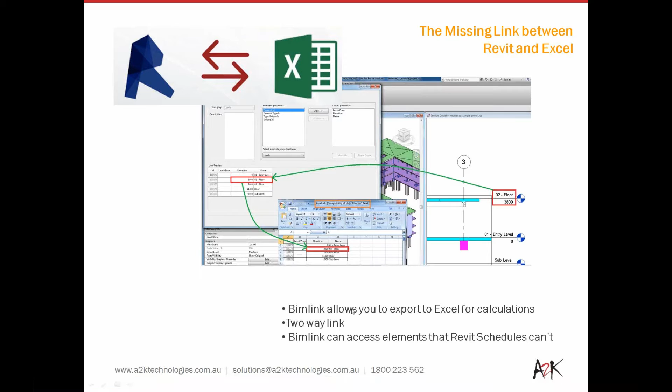We'll go through doing things like renaming views, which will make everyone's life a lot quicker. Also, at the same time, I'll be doing the drawing sheets and adding a prefix, like a different stage or work package as needed at different stages.

In addition to why you need to head towards the BIMLink game, there's been a fair bit of misconception out there that you only need BIMLink when it's a BIM project.

One thing you can really use the BIMLink tools for is reducing the red pen markup, which I'm going to show you. It's just the concept of changing a workflow you've been doing for the last 20 years. Just taking a step back and swapping a few things around, you can save quite a considerable amount of time.

In addition to that, we can also learn how to drive actual modelling elements from an Excel spreadsheet. This goes hand in hand with the red pen markup - you can fill out data and elements will actually change at the same time.

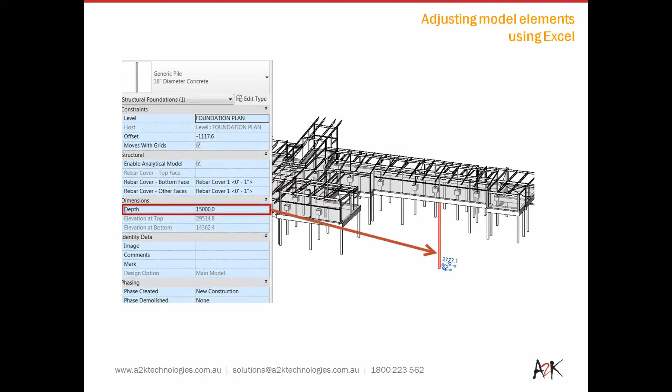One of the most powerful items within BIMLink is accessing the hidden data. Natively inside a Revit schedule, you only have a certain amount of fields or parameters that you can access for each object. BIMLink basically goes down to a new level, allowing you to access these levels and do something with it.

As you can see on the screen, which I'll show in the demonstration, is your coordinates. So if you're having to do a coordinate schedule for all your piles, you have the ability to essentially set up your X and Y coordinates.

At this point I'll quickly jump back into Revit now and go through some of the demos. So our first one - can everyone see my screen? Sean, got my screen up? Yep, perfect.

On the right-hand side you can see the browser setup. Predominantly in a lot of companies' standards, often it's capitals as a start point, especially if you're in a structural sense and copy monitoring levels and grids across - you're often just receiving what has already been set up. So what BIMLink allows you to do is rename some of these to be capitals.

First of all, we'll go and access the BIMLink tool and create a new link. This basically lists anything that's in the project at the time. We'll quickly jump down, looking at views - this is our view names we're looking for at the moment.

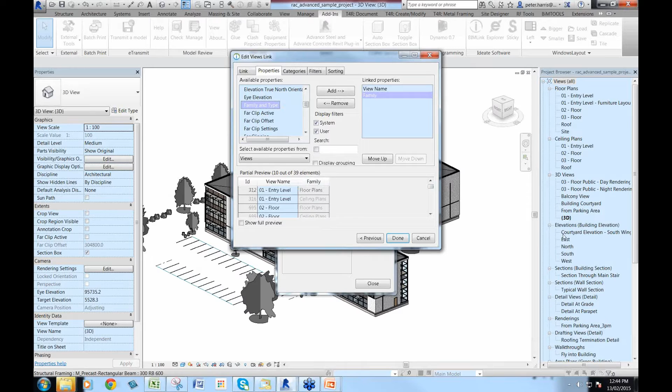So at this point here, I'm just now going to go to Done and export this out. And I'll be just basically placing at this point here and opening this in Excel.

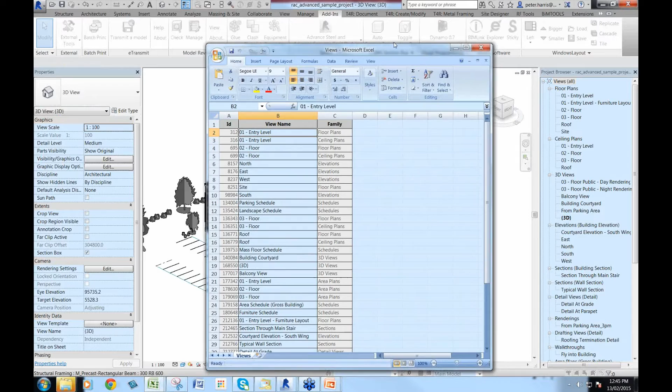So at this point here, it'll just allow me to very quickly start looking at, say, floor plans. So this way I can have a look at floor plans, and I'm only seeing what floor plans are there at the moment. There are many other sorting options under the data with sorting that you can do, but this sort of is just a quicker way for filtering things out.

So in this case here, I'll just go select all. Now what I want to do is make these all capitals. So again, Excel has a pretty powerful tool. So using a function, it's called equal upper, to convert the string to uppercase, starting the function, and you can sort of see how it is.

And as we know from an Excel point of view, very easy to sort of flood all your views. Now at the moment, I haven't worried about if they're all mix and match because it's looking for an ID. So everything within a Revit space has a unique ID. So O1 entry level has a unique ID 312. So in this case here, it's just based in order of ID numbers.

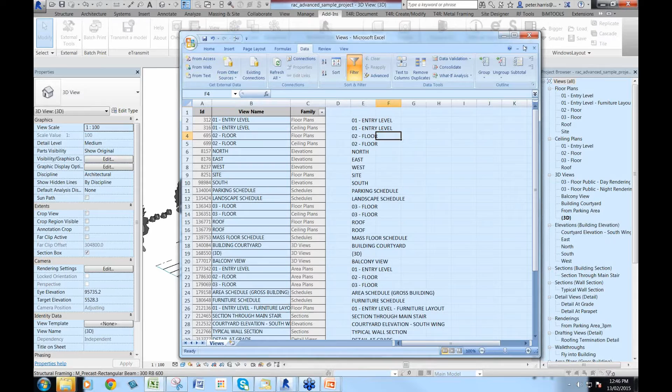So now once I've sort of completed my initial task, I can then copy all the results and paste special and get all the values across. So at this point here, I can leave this here. I don't need to delete any items. I can now save my Excel, close.

I can now, once I've completed that, import, selecting my views, which is the one I've just created. When you are looking at renaming views, it's highly recommended that you do not press yes. This will rename all the corresponding views.

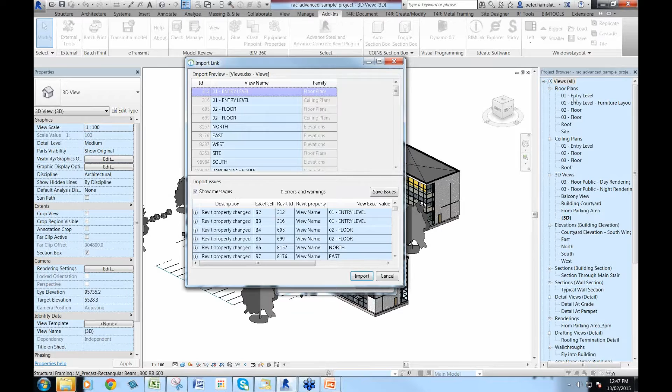So this will now essentially go through. It's just telling us what it's about to do. So what we're looking for is 0 errors and warnings. So that means as soon as I go import, if you're looking on the right-hand side, you should see this update automatically.

And as you can see, a very, very quick method to be able to essentially do uppercase. At the same time, because it's in Excel, you can do spell checks and whatever you need to do.

Now, if I now need to sort of, I'm going to go back and add, just to bring you back into Excel, I'm going to sort of add that this is stage 1 for these floor plans. So I'll just quickly open views. So here they are here. So we can sort of see at the moment what it is.

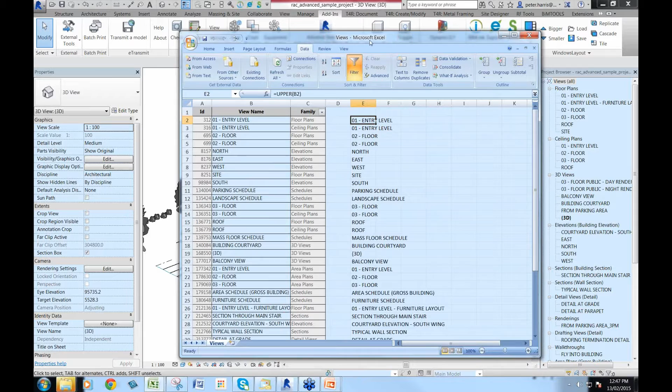Now, if I use a different command, so if I start filling out a new set of text called stage 1 as an example, now what I want to do is, because I only want to work on floor plans, so I'm just going to go back to the floor plans just to filter my list.

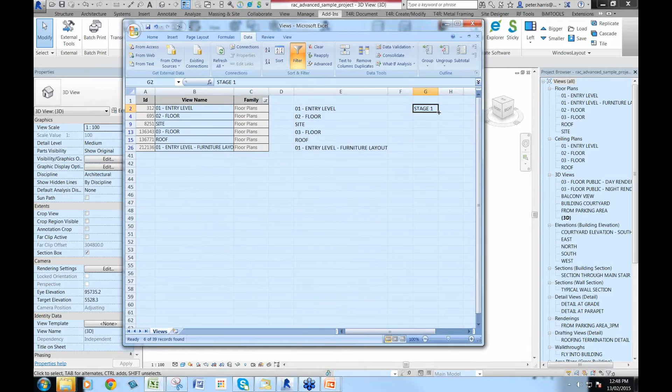So at this point here, now Excel has another command called concatenate. So it joins a series of strings. So if I select that, I want this to be stage 1, comma, inverted commas, dash. So that basically allows me like a typing text. And then selecting then the current text, and you'll sort of see what's done.

So it's stage 1, 01 entry level. So if I now essentially select flood my drawing, and then essentially flood this, you can sort of see how each of these cells are being grabbed as it is. So again, using different commands inside Excel can very quickly help you set things up.

So I'll just paste special, values only again, and okay. Oops, try again. Not quite sure what it's doing. Sorry. Just bear with me.

Activating BIMLink, importing this, and again it's going to tell me at the moment there's probably something that's not quite correct. That's okay, I'm just going to go import and close, and hopefully the answer will be cancel.

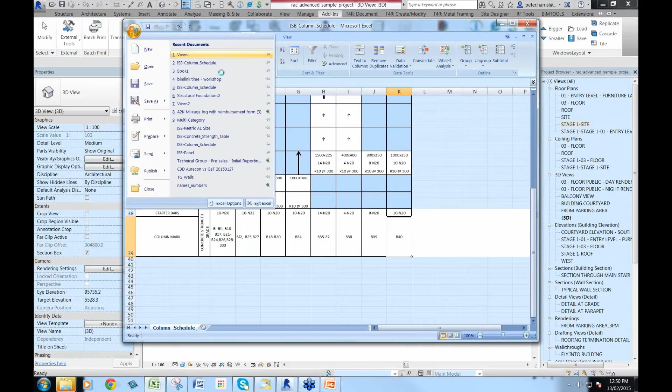You can see how some of these have jumped through very quickly. I'm pretty sure what it had to do with, one of the main reasons I was having the issue is I'd probably have to come back and select all and get all these going through at the same time. Excel gets a little upset with cut and pasting when you have a reduced list at the time.

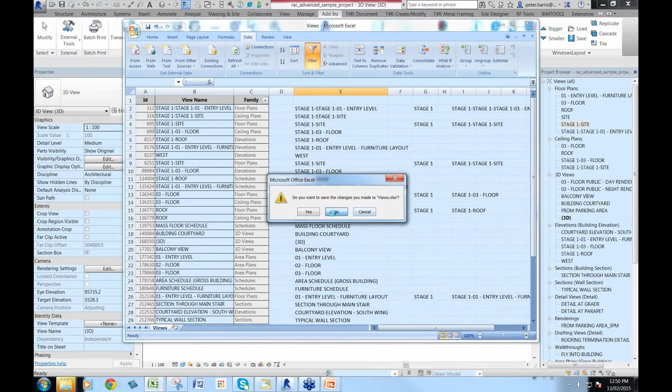As you can see, very quickly, it's a quick tool to help rename things, especially if you have particular BIM contracts and have to rename views according to different contract requirements. In addition to views, you can also do sheets. Setting up drawing sheets can be quite time-consuming.

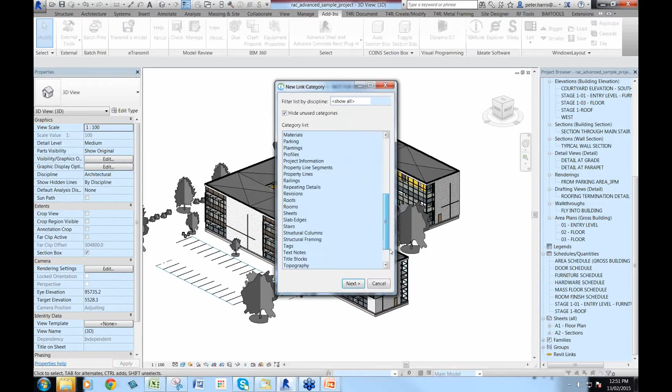Activating BIMLink, in this case I'm going to create a new link, and this one will be drawing sheets. So I'm coming down, looking for sheets, and again I've got all different cells. I'm going to come down and look for sheet number, name, number. I'll just quickly move that one up, so it's at that point there.

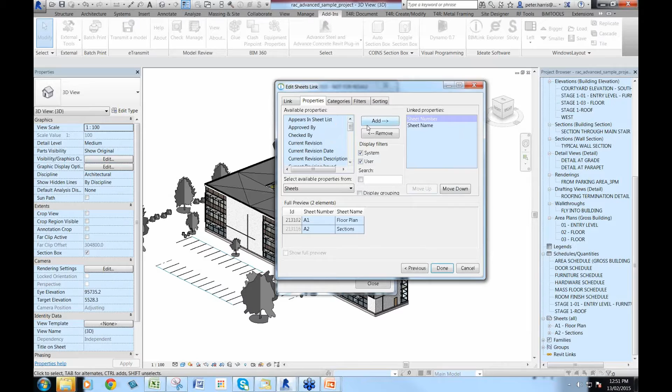I can put any of these other parameters in here, and as part of the training that Sean will talk about at the end, we'll teach you how you can use this to fill out all your revisions. That's done, and I'll export this back out, and I'll call this one Sheets.

Open File. As you can see, this might be called Set Out Plan. So you can have these linking from Excel to Revit. In addition to that, you also have the ability to create your own drawing sheets.

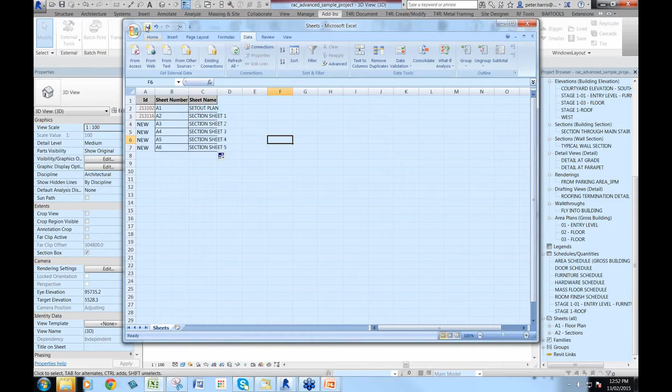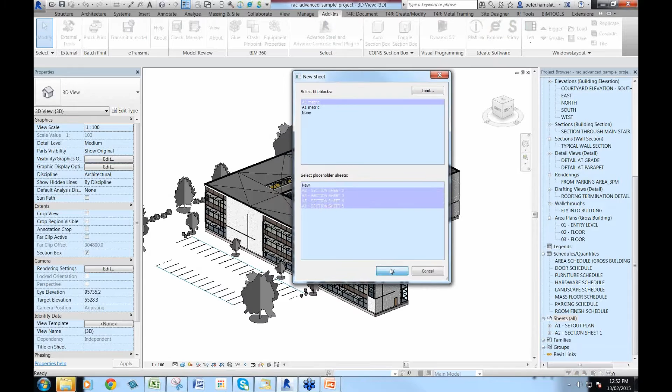Closing this, back into Revit, re-importing, selecting the sheets, import, close. At the moment there's only 2 drawing sheets. Right-click, New Sheet, in the placeholders, My New Sheets. It's a very quick method to fill out your drawings.

In addition to that, there's other add-ins. At some stage we'll be doing webinars through the Tools4Revit, which will allow you to also go through and place views within a drawing sheet. So that's the first part of it, which is the renaming, the admin task.

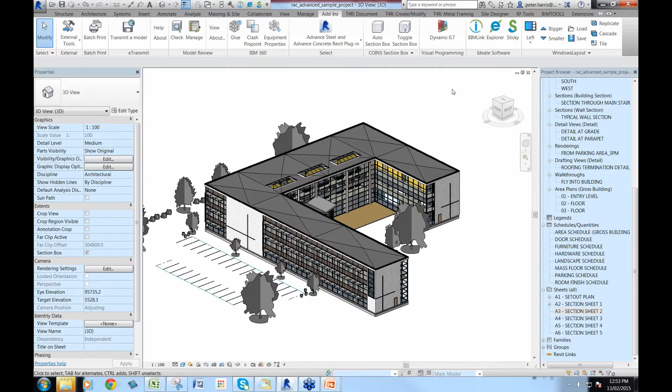The red pen component comes into play for basically anything you need to edit. So what I'm going to do is close out of this and jump into a structural model. I'll just minimize this.

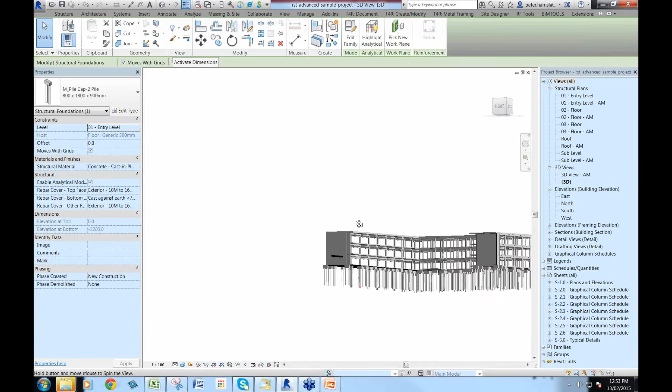Okay, so these are just the Autodesk sample files. Nothing special, but what I want to be able to do first is red pen markup. This can go for any discipline, but structural is a simpler method to show. As an example, each of these piles may need unique elements, which is different loadings, ultimate load, working load.

Very quickly, just to set this all up, I can go to a new project parameter. I'm just going to add a new one, and this will be called footing working load. If you want a combination of text and numbers, you can use text as a type, or numbers or lengths. I'll be using text, and I'll just quickly throw in a text group instance for a quick method.

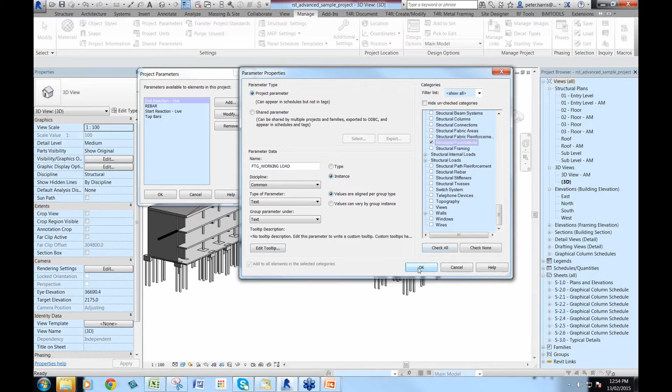Normally I will go through and do structural foundations, which is the one I need. And OK, now if this is a structural foundation, and I know that by hovering or looking to the bottom left, so when I select one of these piles, I've now got my new parameter there.

Now from a red pen markup point of view, your engineer is either going to have to spend a lot of time marking up a red pen on the drawing and give it to the drafter, and they're going to have to do it, or you bring BIMLink into play. That will allow you to essentially export all these piles.

So I'll be going to a new link, and I'll be looking for structural foundation, and it's correct.

What I'm looking for is my new footing working load parameter on the left-hand side. On a normal project, in training we'll go through the process of how you can number your elements. You may also have individual marks, so I might move that up to P1, P2, P3, etc. You can fill this up as much as you need to.

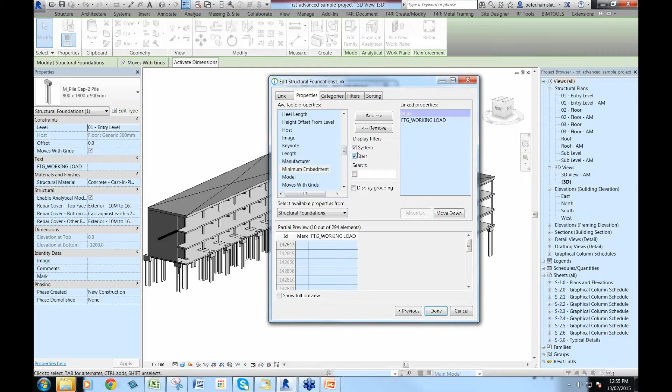Once I'm completed, I export this out and open the file. As you can see, even if these are all say P1 types, this will give you the very quick ability to flood your drawing.

So I've got all my piles, and now the engineer can go and fill out all different data. I'll just sort of do some different information - this is the red pen markup that the engineer can essentially fill out a spreadsheet with. Make this quick.

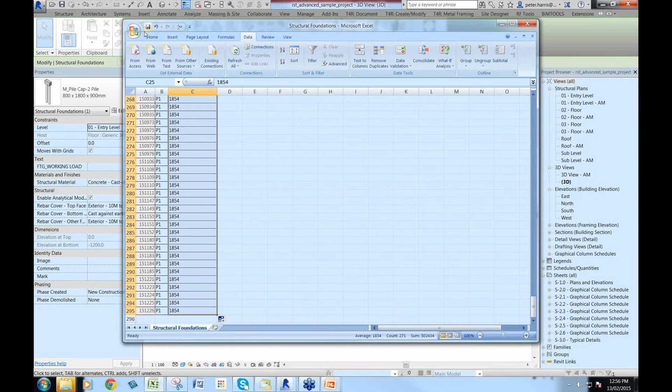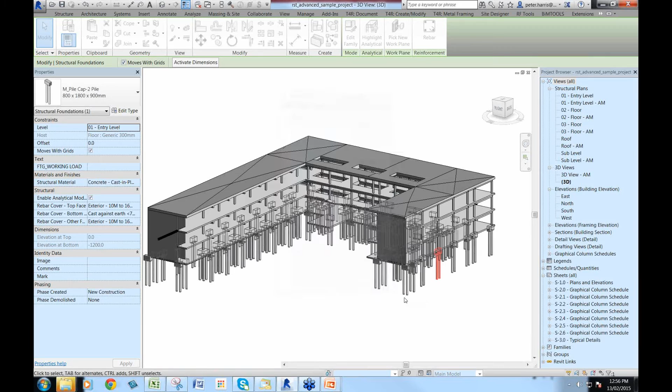Saving the spreadsheet, re-importing, structural foundations. As you can see, it's going to import and fill out some data. Obviously when duplicate marks occur, which is correct in that case, you can see the data filled out.

If I now quickly jump over and create a new foundation schedule, which is the final output of what you need on your project, obviously now with our new information it's got a mark, and I can add comments, can add whatever I wish.

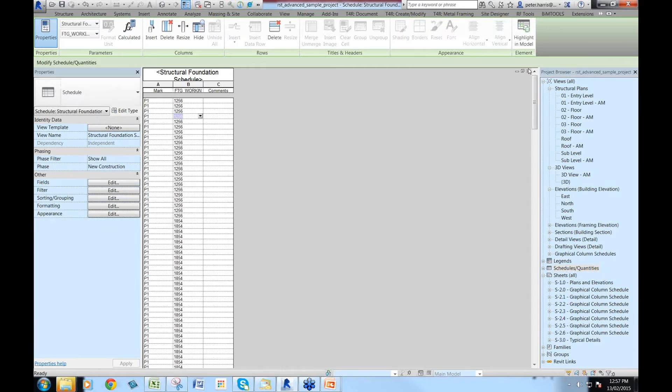So very quickly you're getting all the data. Rather than the individual person filling out information, as you can see, we use Excel as a power tool. Now in addition to this, what we can do is actually start driving the model.

So what we're going to try and do, and the reason I'm going to do it in this step, is because a lot of people miss the step that it has to be an instance-based parameter. This is out of the box families, a standard Autodesk project.

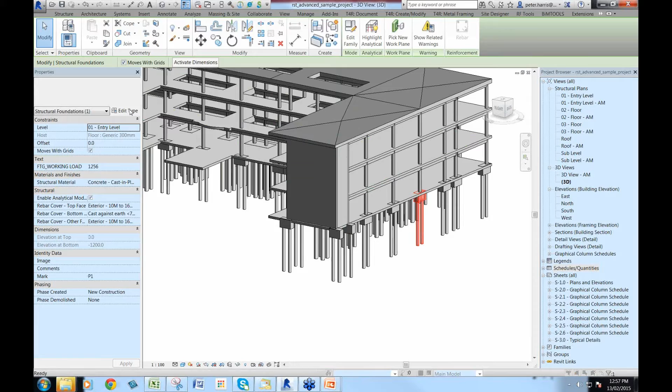As you can see, if I go now to edit type, you can see how basically it's got a length. What I'm looking for essentially is the pile depth - anything that's going to drive the pile.

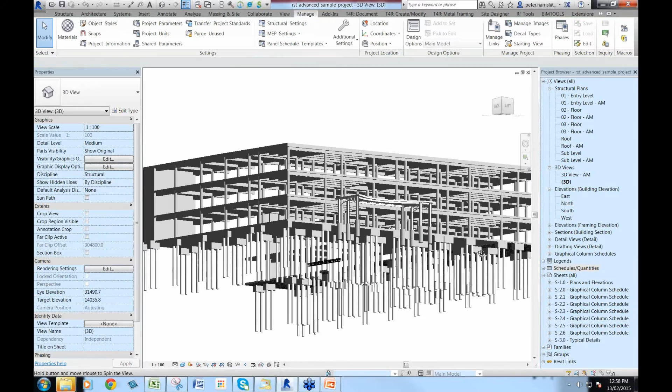So what I might do is try and edit some of these. There might be some individual piles, so bear with me for a tick. What I'm looking for is where does it actually drive the pile now, which it doesn't. So jumping through to edit family mode.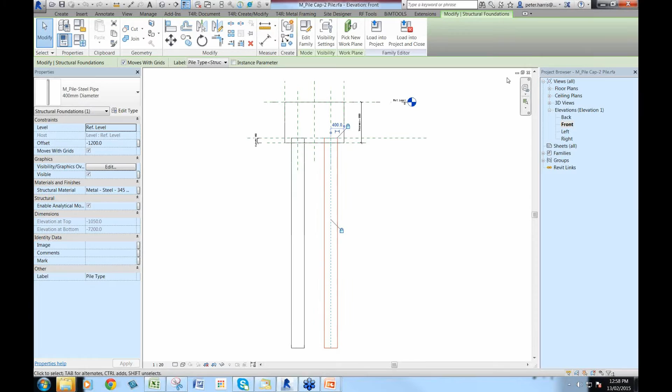Okay, hopefully we don't have any data coming through at the moment. At this point here, we'd have to switch some of these to instance. Just for the ease of the training, what I'm going to do is drop in a single pile, and this will very quickly give you access.

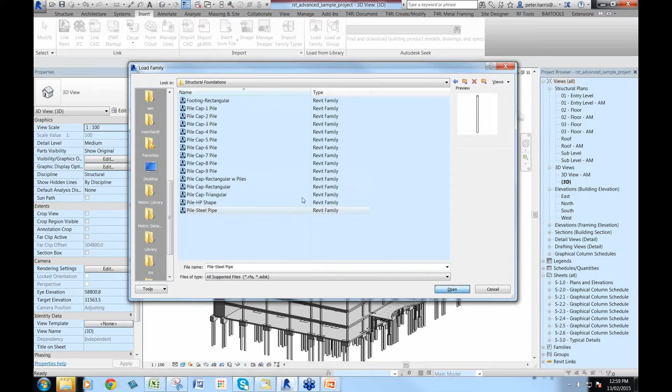Now I've deliberately done this because if it all works perfect in a demo, you guys are going to technically have a go and then realise half the information won't work. So I'm just going to drop in a couple of piles - I hope we've got our single pile in here, which we do.

Again, these are all out-of-the-box families. Hopefully I can sort of see there's the depth where I need that to be instance-based, so I'll just quickly switch him back across to be instance-based.

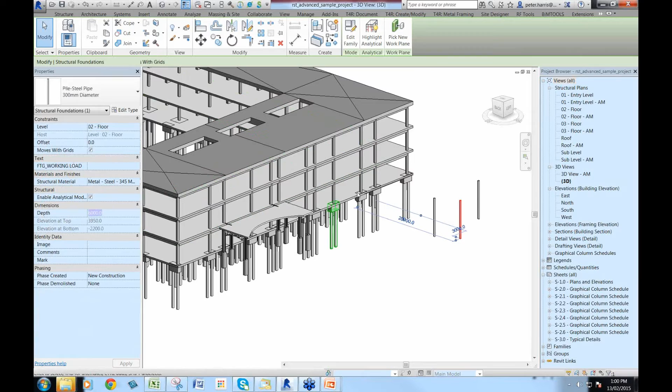Okay, so we should now have individual control which you want. If you can imagine you've got hundreds of these piles coming across, as you can sort of see I've got 12 metres, that should now drive length.

Now, being instance-based, obviously if I now go back to structure foundation, I could go and create a new one, but it would make sense that you basically continually layer up your existing link and add existing data. So I'm now looking for depth.

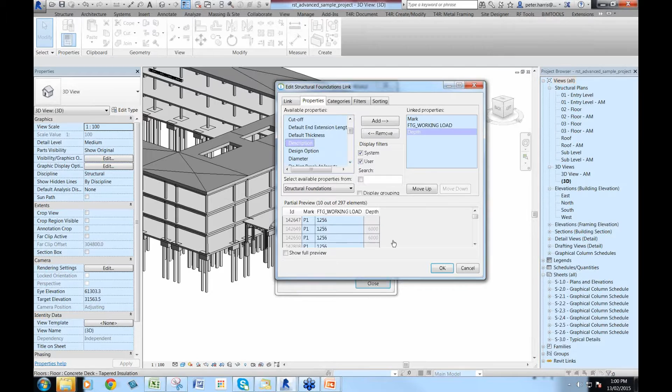And I can sort of see where some of these 6,000 ones are coming through. So what I also might put in here is family and type, and this is going to help me sort of from a filtering point of view.

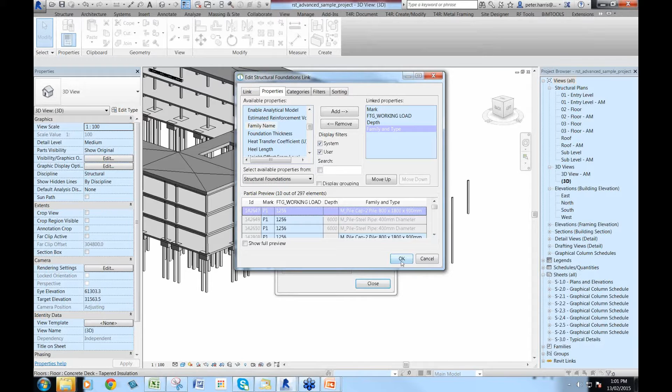I'll just go through that before I export, just double check it. I'm looking for its pile steel, I'm looking for depth as the 6000. So if I now go back to this point here, I'll export this back out, and it's overwrite in this case.

Okay, so you can sort of see the greyed out ones versus the full colour, the light blue. Obviously these are the ones that I can actually edit the information for.

Okay, scrolling down, here's some values here too. So if I now just very quickly change these to 15,000, this will hopefully give you the idea. If you have this pre-set up, and we'll show you in the training, you can have all your pile depths, control all your loadings, so you get one spreadsheet with all the information filled out in one go. Okay, so I'll just make that 10,000. So we should have 3 different piles, saving, closing, import.

Okay, so it's 3 elements that have changed, which is correct. Import, close, and hopefully you just saw now those elements have changed. So that gives you greater flexibility. And to make this work, it's just changing some of your habits that you've been doing for a while, and just sort of taking a step back and working out a best workflow.

So that's the sort of red pen and adjusting the model. Now, where you can sort of get hidden data is, as an example, on any of these foundations, there would be a coordinates. After I've acquired coordinates and got all my data set up natively inside schedules, which I'll show you, if I go to a structural foundation schedule, and it's the same with any elements in any of the packages, I can't see the coordinates. There's no fields available.

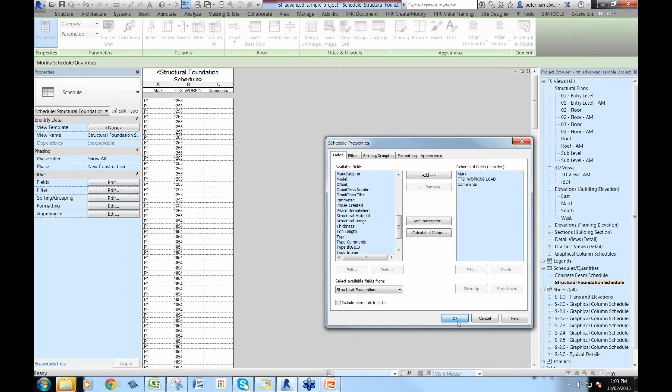So what I'm going to do is use the comments on these, just for this example. I'm going to fill that out with the coordinates. So again, with the BIMLink, accessing that, and double clicking to access more. So again, what I'm doing is layering it up slowly but surely. So at this point here, I can now go down to coordinates, selecting my X and Y's, exporting these out.

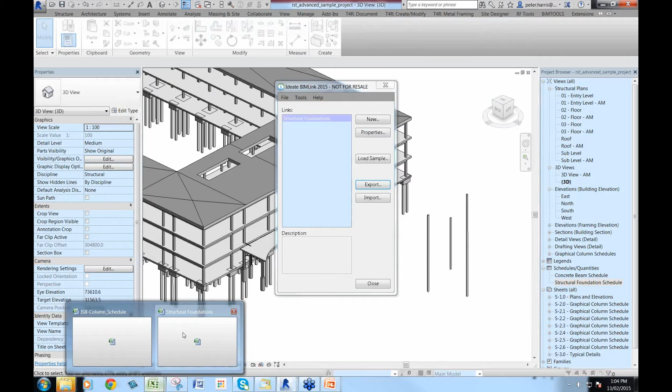Opening the file, and you should be able to see all the coordinates of all the piles. So what I'm going to do now, at this point here, you can sort of see very quickly I forgot to add the comments, so that's fine. Yeah, all you're going to have to do is just go back into BIMLink, so we'll just close that out again.

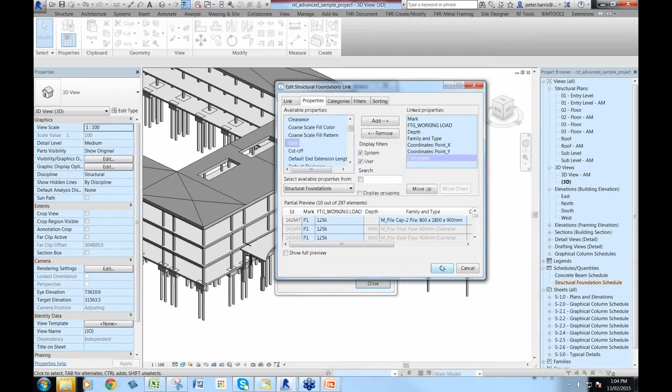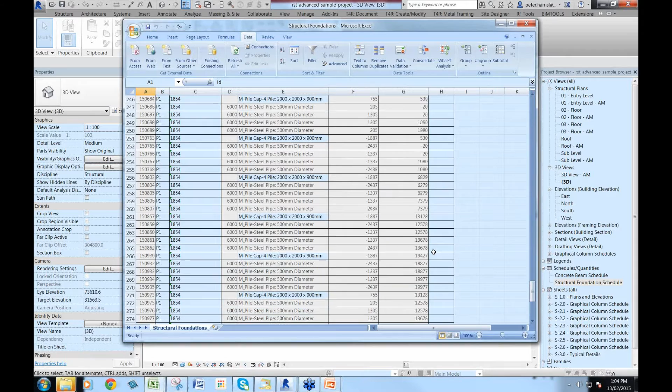Selecting this, exporting that back out, opening my Excel. Okay, so here's my comments, I'm just using that data. Okay, so what I want to do at this point here is sort of grab the X and the Y with a comma between and have it as basically a data set out point.

Okay, so using the function concatenate, I want to essentially have it say P1, comma, inverted commas, start brackets, inverted commas, comma, and then comma, inverted commas. And we teach you all this inside the training.

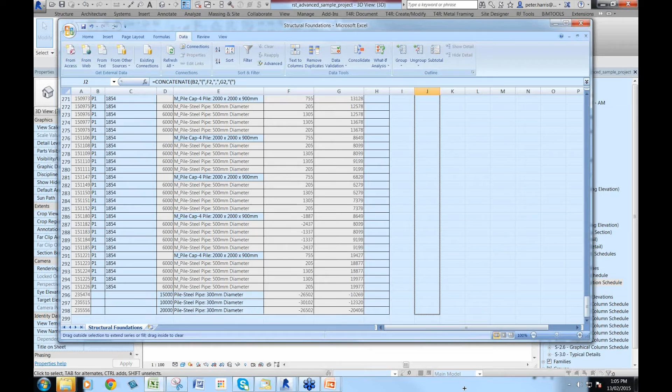As you can see now, that should very quickly... basically what I'm going to do is fill this out. So it's P1, it's reading all the data. Now that's just units, this is just an example here, I just won't worry at the moment. So I'll just quickly flood my model. Okay, as you can see at the moment there's no parameters sitting over here, so I just might quickly make these P2.

So that's all come through, which is good. Grabbing all my information, copy, paste the values, saving this, re-importing back through. As you can see, it's 297 elements it's found, so there should be 297 foundation elements. Import and close, duplicate marks, which was correct prior.

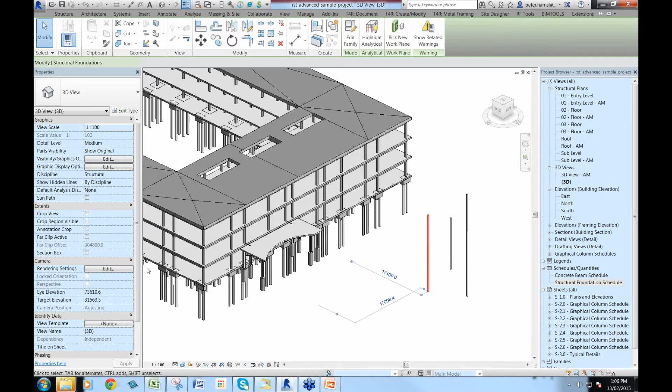As you see now, I've now got my comments, which is at P2, and it's got a coordinate set up. So that should sort of give you a bit of a taste of all the hidden data, and there are many, many more things that you can access that you can't natively see from a Revit point of view.

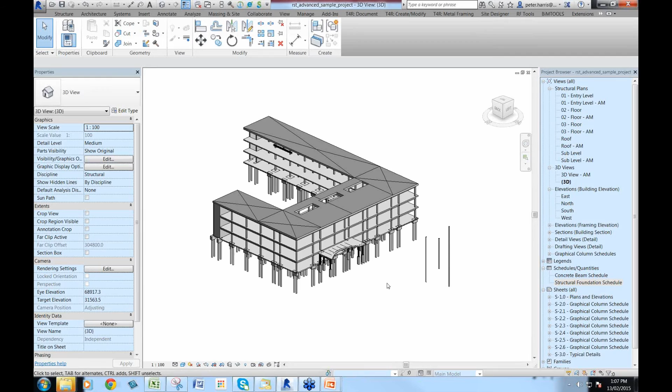Okay, so that's the sort of hidden data information and the red pen markup and the views. Now, as I've just said, there's many other things you can try and do with this. It's essentially, from a BIMLink point of view, it's anything that is repetition. So if there's a repetitive task in your office, you've got to try and find a way through it, and at least BIMLink will give you the option.

Now, that's the sort of first few things I want to show in the BIMLink. Sean, would you like me to now jump through and just show them a bit of the Sticky and the Explorer? There are other products that Ideate make.

Yeah, there's just one quick question here from Christian, which was to change the sizes, does that size have to exist in your project already?

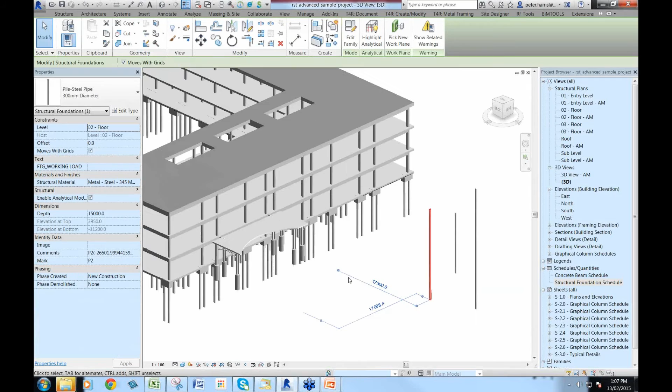To change the size of this pile, yes it does, because BIMLink is looking for anything within the project and the project's database. So if you don't have that type or size within your project, you can't extract it from a secondary database.

There are quite a few questions about Excel skills, but as mentioned, that will be covered in training courses. Part of the BIMLink training we're setting up includes a handout cheat sheet. You can't become a guru in Excel, but we can give you the top 6 to 10 tips of what you need to do inside it.

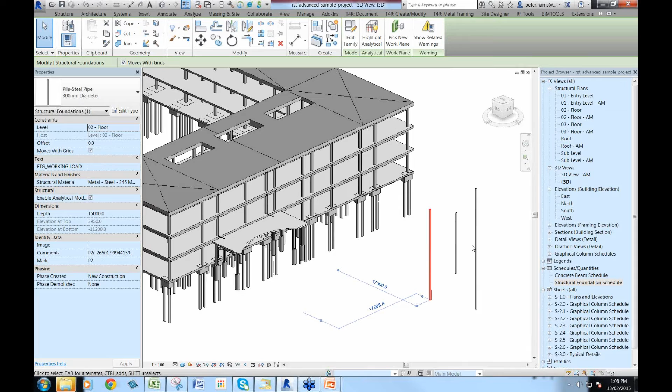The other questions were really about the applications of this. Obviously you've got the experience to know you can use it for these piles. A question just came in asking what the applications are for estimating.

Yes, correct. Any element that you model, if it has a volume or an area - let's pick this one here, the roof, what have we got? We've got a volume and an area. If we've got that information, in addition to other parameters for estimating, these are all inbuilt, which is cost. But that's not stopping you as a business from having your own inbuilt information to apply rates or whatever you need, and you can export everything out from a costing point of view.

However, it is as accurate as you are modeling, because it is real live data.

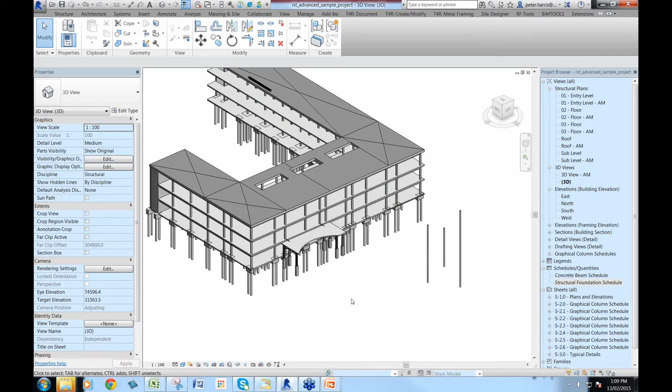There's plenty of questions around that, so I'll pick the common themes. Coming back to where to apply this, part of what I do is also get to sites to help people understand their current workflows and where they can use this - almost trying to enlighten them that if you change some of your workflows, you can save a lot of time and hence a lot of money in the business.

Could we jump onto Sticky and Explorer as well? Sure, okay, let's see where we are.

There's one more question here, Peter: can the systems retain superseded plans and documentation for a legal sense - i.e. plan revision changes, aside Plan A and Plan B - can you still show what's been superseded and what is current in the setup of the schedule?

Could you read that first part again to do with context? So the question is if the systems can be used for superseded plans - if you've changed revision A to revision B, what can you access from revision A, or how would you go about that process?

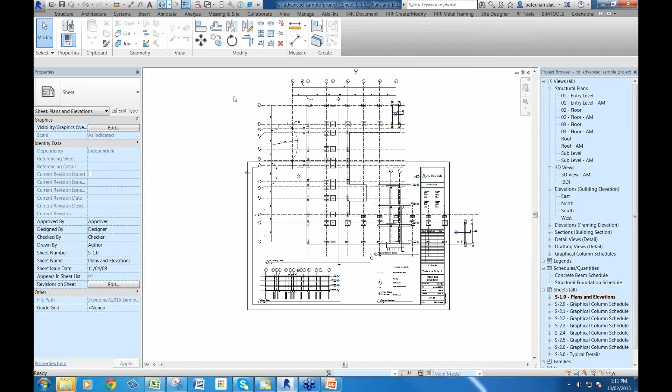What you can do - because essentially this program brings Excel into the game, which is data extraction in or out - if, for example, and I've done this in the past, this was a tender set of documents, I could very easily select every element in my tender set of documents. I'll just do one item as an example, and fill out that this is called tender, so that way it's tracked.

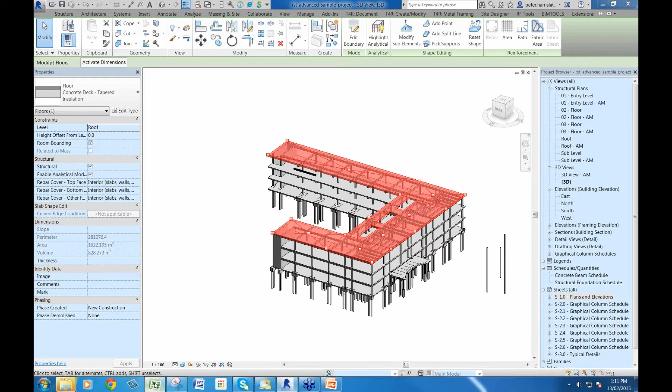Therefore, what I could then do later down the track is essentially export another spreadsheet, and you could do a comparison back through Excel, because every element has a unique ID. That would allow us to compare, if it's the same ID number, what the difference is between the two. So it does give you the ability to access that, but it starts to go into the high end of using VLOOKUP and pivot tables in Excel. But it is possible.

I think the situation is you can get quite ambitious, or you can just do the obvious basic stuff, which is really how Excel works anyway. You can do simple formulas, and if you watch some accounting guys using it, they're able to do extremely clever tricks and tips with it as well. So we can summarize that at the end.

Perfect, agreed. Okay, so what I'm going to jump into - currently Ideate, that's the BIMLink. Now they also make what's called Explorer and Sticky. I'll go through Explorer first.

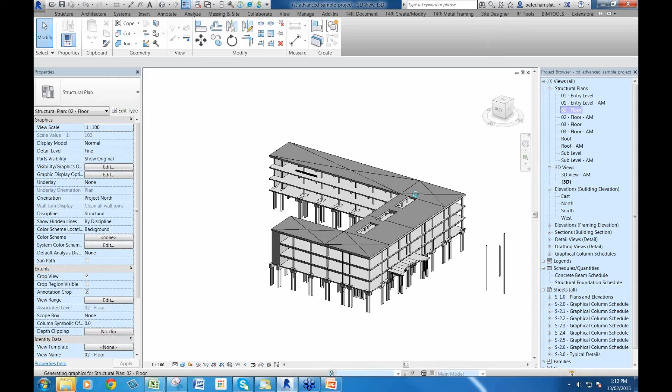Explorer is essentially where you can find potential errors, or it's a way to do auditing. Now, when you've got a large job, or if you've had to audit or check other people's models, sometimes you'll be struggling to understand. As you can see here, these all look like tags which are reading real data. Now that one looks like a tag as well, but I know for a fact that's text. Yes, I did deliberately set this up for a fail, so we do see it.

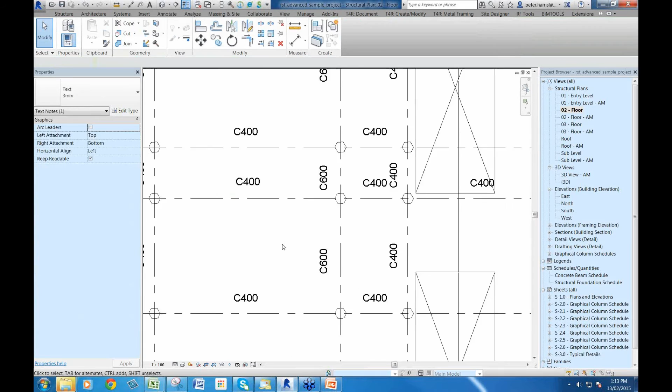So the Explorer interface works like almost a super filter. Normally down the bottom right you've got your normal filter when you're selecting elements. I'll jump out of that and give you a quick idea of the difference. If I select a series of elements and filter, you can see at the moment there's 32 elements. However, it just tells you it's a floor, or it just tells you that it's a framing member. You can only get to one level.

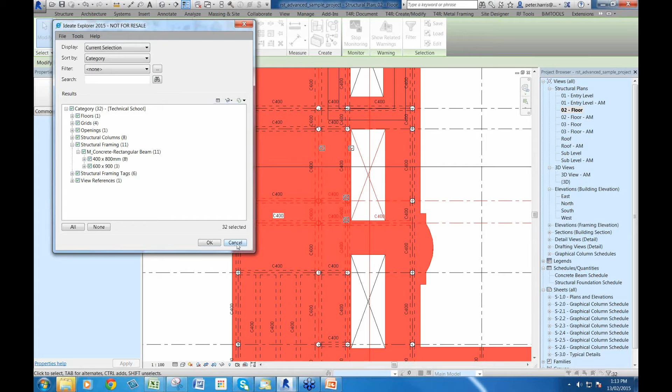Whereas while it's still selected, if I'm now running Explorer, it can get to a whole new level. So it's still 32 items, but all of a sudden I can get to a new level: out of those, 11 are structural framing, I've got 8 which are beams, of that 400 by 800 and 600 by 900. So that's the first concept of what Explorer is. It's like a souped up filter that allows you to get to points.

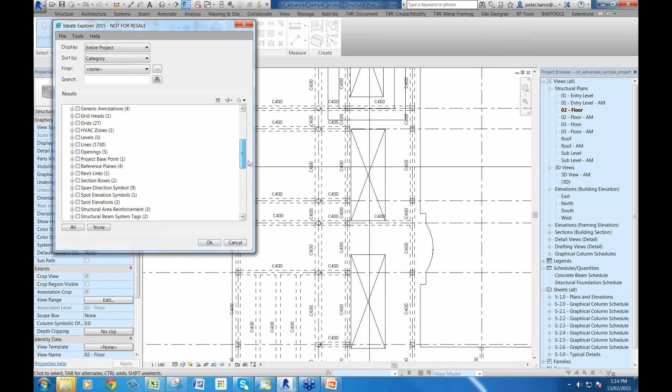Where I've used this multiple times in the past is to try and find if there have been errors in models. People make mistakes, but sometimes on deadlines you've had to rush things and take a shortcut. So what I can do here is basically select the entire project, and the first thing I'm going to look for is where any text is, and I know the office standard was 3 mil text, where has someone potentially written something that looks like a tag.

Now, to me they don't look like tags, but this one here is really calling up what it should be. That should have been a tag. So if that was a very large model, it would very quickly give me the chance to understand.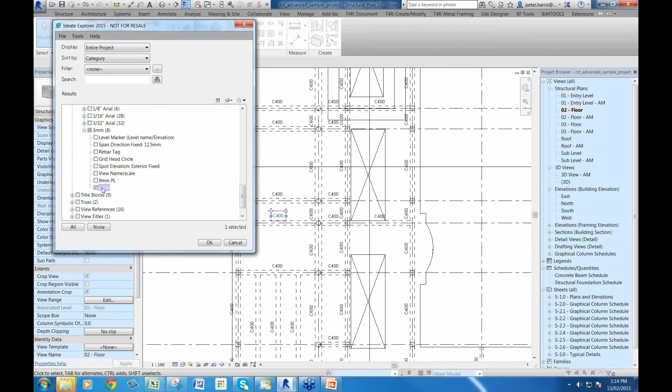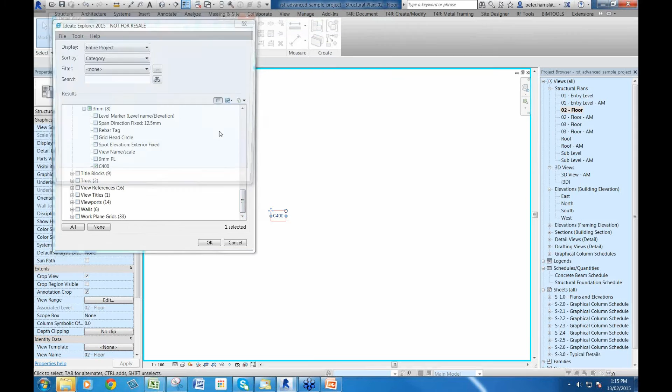At that point, I can isolate it if I wish, so you can see that in the view, or I can essentially create a new view. I could go to a detail view and export. So if that exports to Excel, this is where you come back to, if you have a QA checking between elements, you can use this because each element has a unique ID. If you have a unique ID, you can use that in tandem with BIMLink and load up a parameter automatically. Again, that's part of the future training.

So that's the concept of what Explorer does. It's a very good auditing tool and a souped up filter. So that's one of the tools. The other tool, which was just released about 2 to 3 weeks ago, is called Sticky.

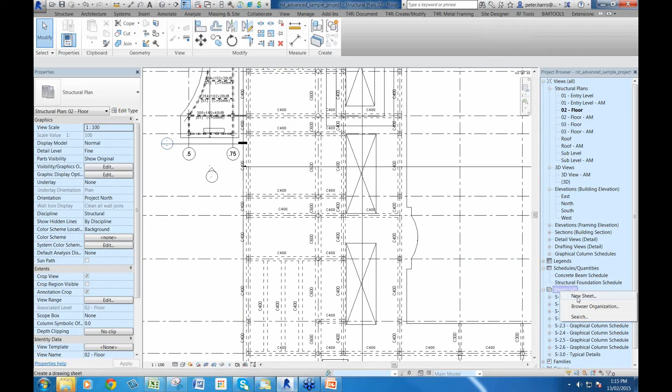Sticky is used for non-BIM data. This is not to control the data of what we've been doing so far. For an example, if I just quickly put on an A1 sheet, just a blank sheet. Now I know from a structural sense, creating column schedules has always been painful, but you can use this for any sort of scheduling of any type. Now I'll just close this one out.

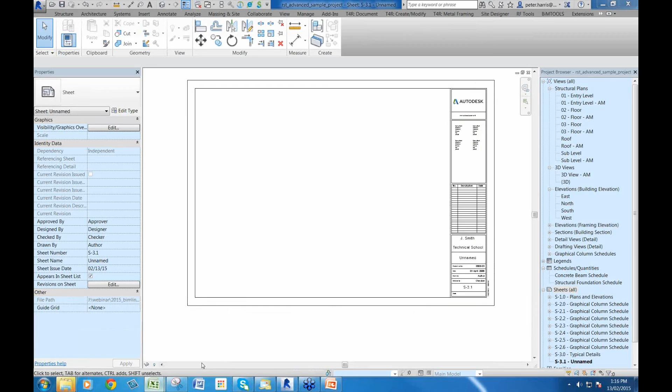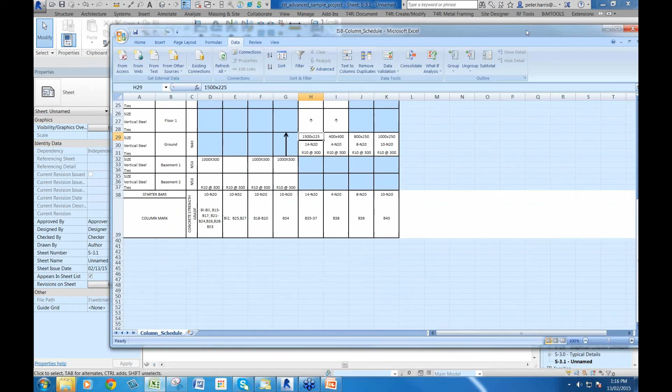Okay, so hopefully you can all see the screen, which is essentially a column schedule. This is sort of looking a bit like how we've always done it historically, collecting numbers, filling out the data you need. So this will give you a bit of a taste of what it can do. All right, so I've got my column schedule there, I'm happy with that. So what I can do now is go to Sticky, create a new Sticky.

I'm going to go and try and find this file. Okay, samples, I better find out where I've actually put this one. Actually, I might save this away.

Desktop, which is good. Okay, so I'll just go to my desktop. Okay, so there it is. So this has found it. Okay, which is all good.

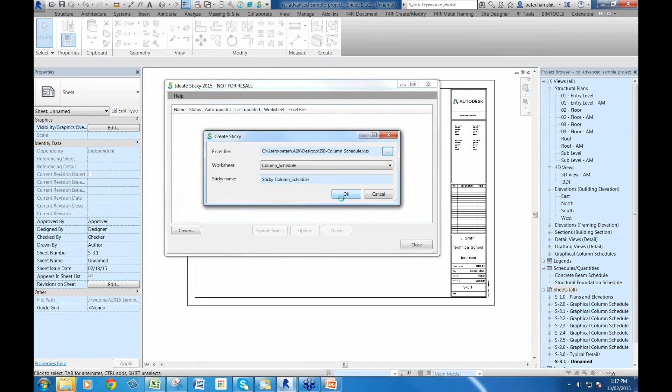I can do automatic update. At this point here, I'm just not going to. I'm just going to go create. So create allows a new one, close, and you can see very quickly it's brought in your schedule.

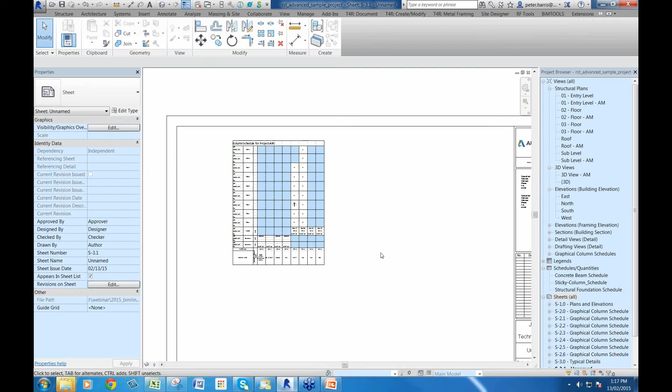So for those that have played around with any of the free apps, which you can get to, there's other Excel into Revit, but it always puts you into a drafting view. This will actually create it as a live link, exactly the same as any of this information. So what this will allow me to do, you can see how that's coming very quickly.

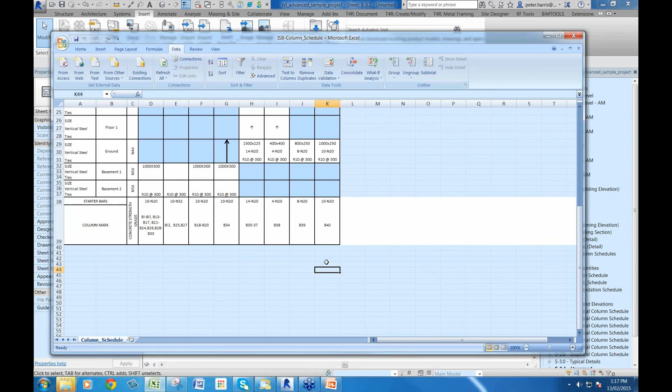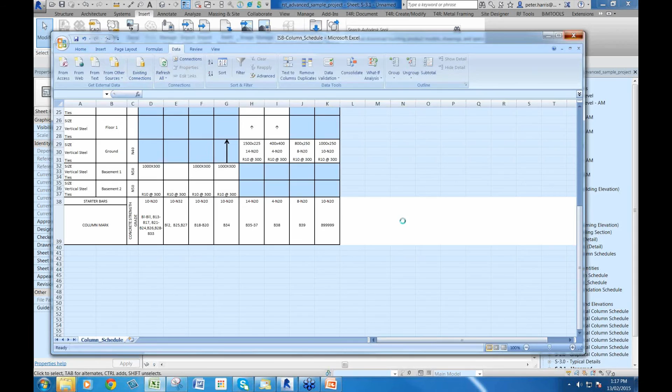If I now go back to my Excel, this will allow people to do a change at any stage, saving this. I might even close that out. I can now come back to Sticky. I'm manually pushing this, so I can now just go update and close, and you can see it's updated.

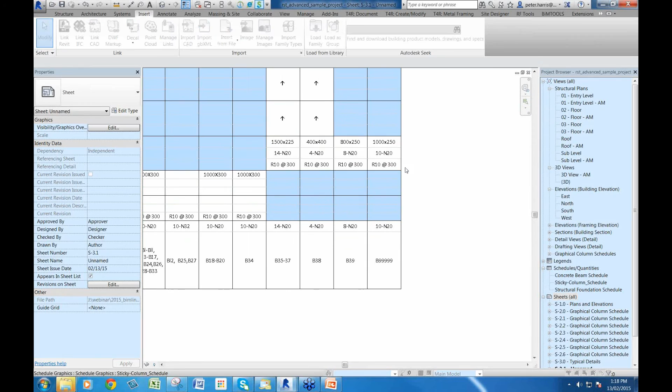And obviously, if I had that automatic update, if I open and close that file, it would automatically update. So it's almost like X-Refing a CAD. It's the linking of Revit files within a Revit model. So that's their new product with Sticky. It's actually quite cool.

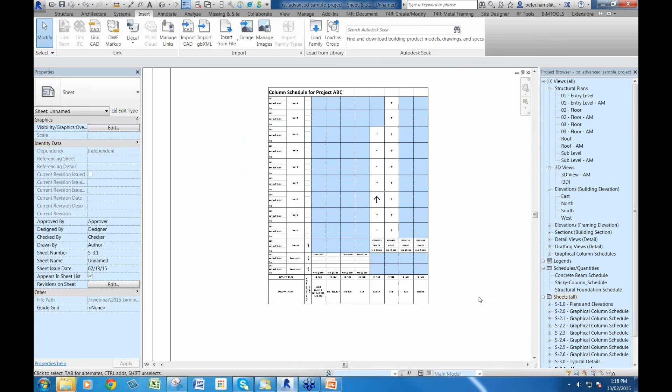Part of the training, we show you a couple of different applications of where you can actually use this. So it's very, very powerful. So Sean, that's probably all I had, mate, to go through some of the Ideate products. Any questions on those last two?

There's basically a lot of comments about the Excel side of it. So I think we'll do more and more of Excel tips and tricks. Yeah, so it's very good, mate.

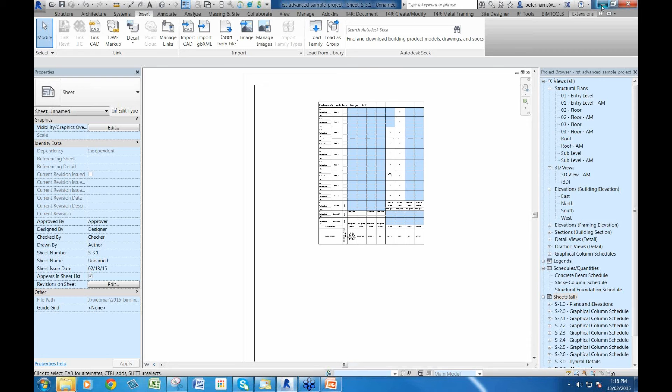So some of the questions are about applications for MEP and structure, which is actually part of the last poll we're going to do as well. So yeah, I might just jump back into the PowerPoint. There you go. So we are quite keen to get training that's relevant to this market.

So there's two questions I want to ask about the training courses. One is the duration. So we reckon it's going to be a day or so. It's a half day of teaching and a half day of exercises, but we'd like to get some confirmation on what people believe for that one. So if you believe a half day is enough, or it should be longer than that.